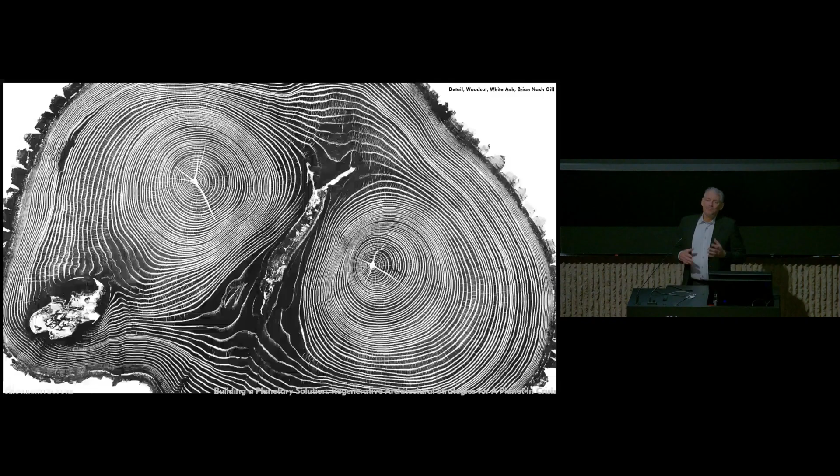So in some senses, as architects, we like to think that we talk a lot about material. And there's an inclination here that we're going to talk about biomaterial, timber. And I think that's because we see that as one solution. But I don't want to talk about the architecture of wood, although you can see from this crosscut of an ash tree that the sorts of flaws and checks and knots that are there explain why wood has been largely discarded until only very recently as a means to build urban centers.

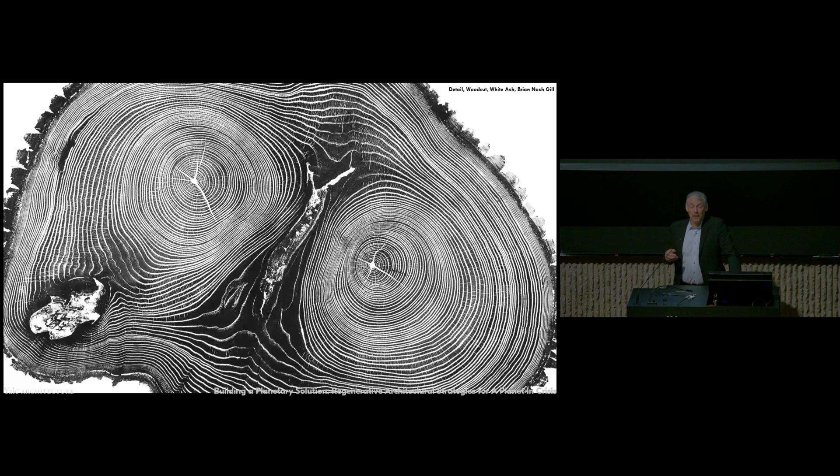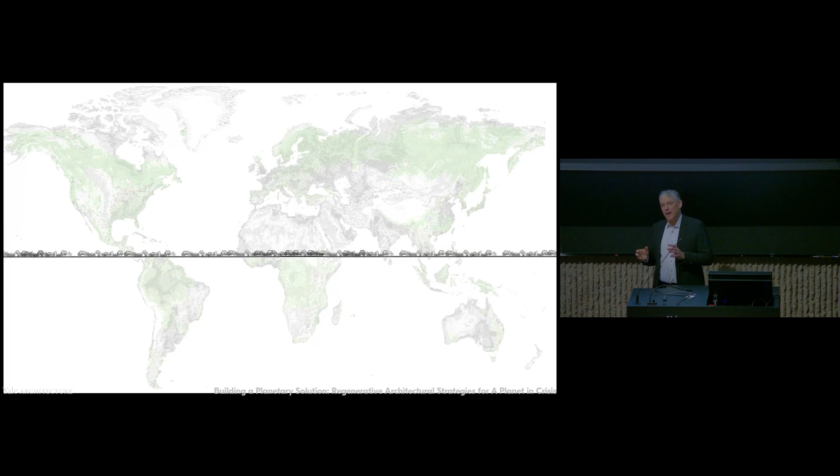Really what we're talking about is putatively natural systems, the systems that have been so thoroughly globally disturbed by human activity that it's hard to call them natural anymore, and their relationship to another land use, urban building and infrastructure. And these are two landscapes that have been historically antagonistic. I should say one is predatory and the other is prey: the city consumes the natural systems in different ways.

And because of that consumption of material and the drawing upon those resources globally, we've created this giant hole in the planet. I use that obviously metaphorically, but also literally, that these processes of consumption, often remote well beyond what we can see or feel or experience, are actually starting to create overt burdens that will be unsustainable, despite our goals over 20 years to be sustainable.

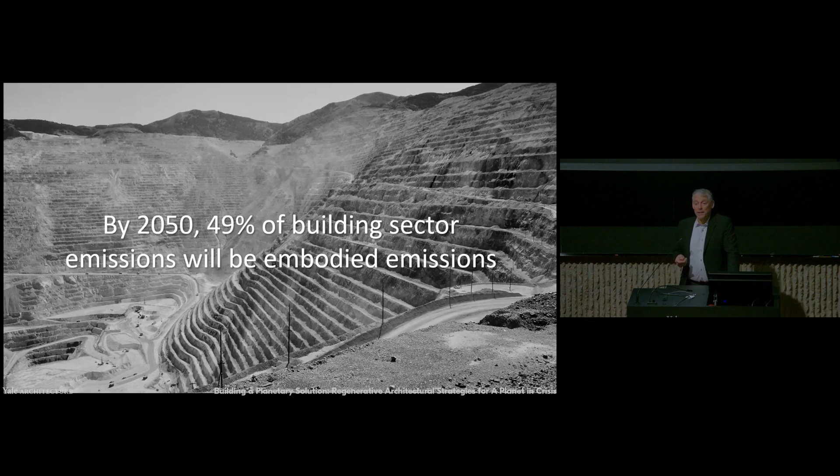Oh, and this chestnut from the Architecture 2030, that, as I mentioned before, nearly half of all of the emissions that we experience in the next 25 years won't be because we're burning too much energy for heating and cooling our buildings, but because we'll be building the buildings, and all of the energies and impacts that go into that will represent half of all anthropogenic building-related impacts.

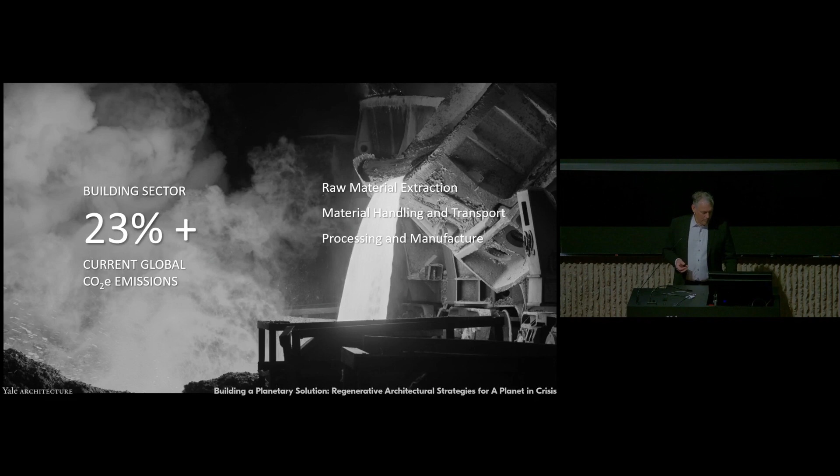And so to break that down really quickly, half of the half, roughly 23%, is associated with that production phase, or so-called embodied phase of building: raw material extraction, material handling, transport, the processing and manufacture of different products. Construction and maintenance of buildings over the building life cycle will entail exchanges of material and human power. And then finally, at the end of the life, which we've thought very little about, we demolish buildings, we often landfill them, and we create a new, almost anthropogenic mat of a new geological stratum across the planet.

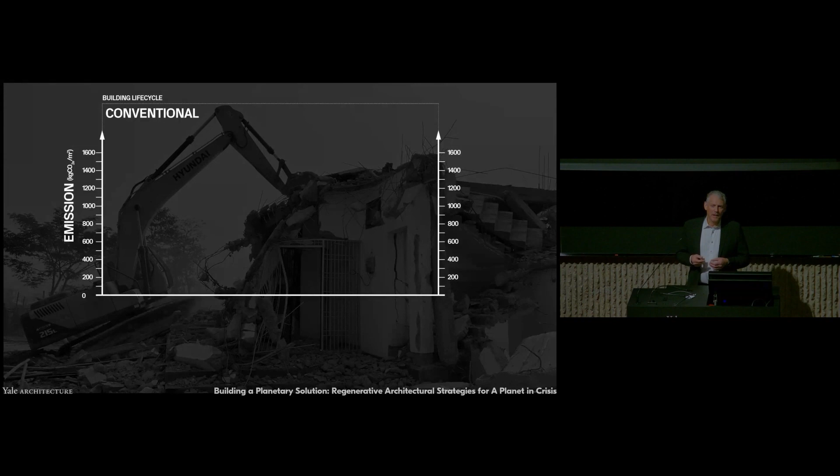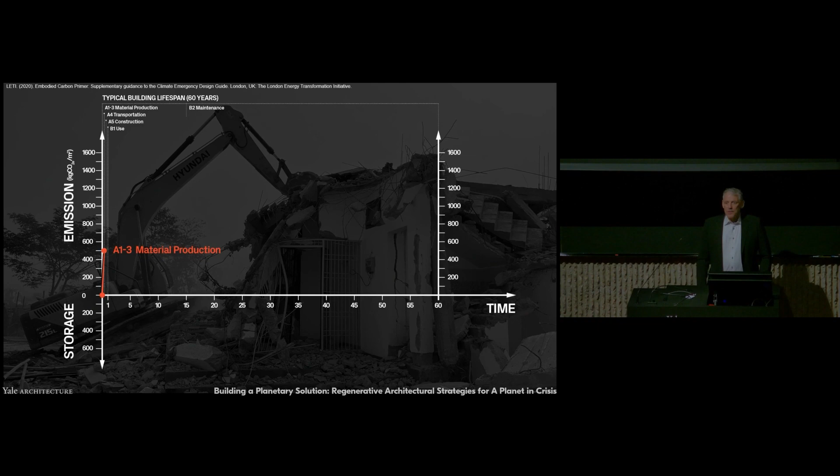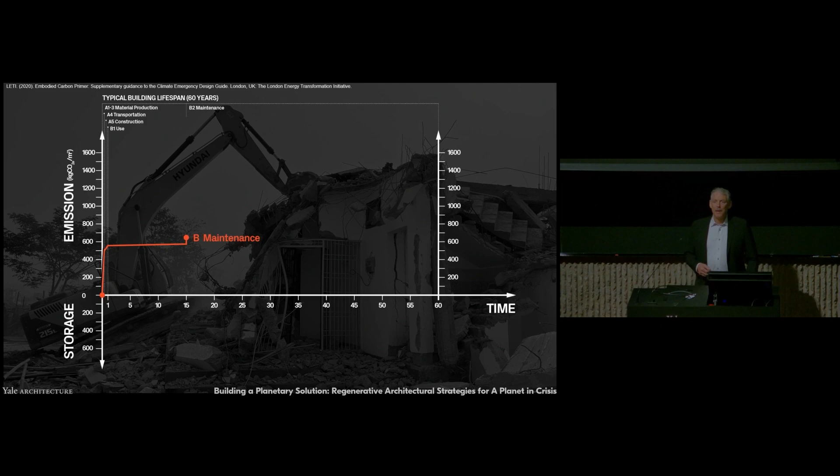There's a little spike. Seems little. Right at the beginning of the building life cycle, in the first year of life, as we create this building and move things into the construction site and build. And then the lights go on and people move in, and maybe 10, 15 years in, we have a little pulse, which is based on the maintenance requirements of the building. And then 15 more years go by and we do some repairs, and that creates another little pulse of carbon emissions. And then again, retrofit when the building doesn't seem to work for us anymore. And then finally at the end, we give up and we tear it down, and we call this the end of life.

And so what we really focused on in the building sector, because we want to be sustainable and we have the right ideas in our hearts and minds, is to make buildings operationally efficient, adding lots of material layers, creating a lot of complexity in mechanical systems to produce high efficiency buildings, or in the case of passive house construction, super efficient buildings. And it's important to note, as I said, that we don't pay off that embodied debt for 25 years if we're just making buildings with business as usual approaches. And if we're super efficient in our buildings, even passive house construction, we never ever pay off that debt, or at least not within the range of climate action that we have.

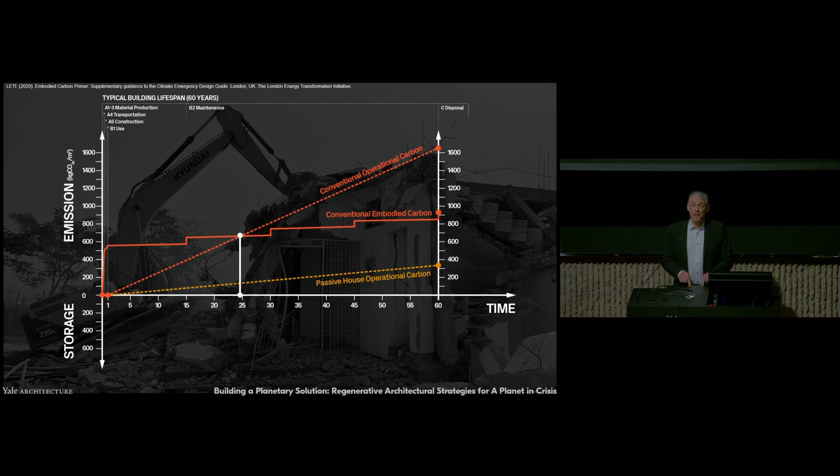And so that's a really important thing to remember, that if we want to act now, we have to think really hard about how we consume materials and how we specify products in our buildings. And I would say even further, we can really expand beyond what lifecycle assessment allows us to consider, which is what happened to those ecosystems from which we dragged resources? How are they doing? And what's going to happen at the end of life to these buildings? Are they going to be landfilled? Could we actually not only design for disassembly, but design for scenarios of reuse of all the materials we put into buildings? This is a huge burden for architects and engineers and builders, but it's something I think we inevitably must face.

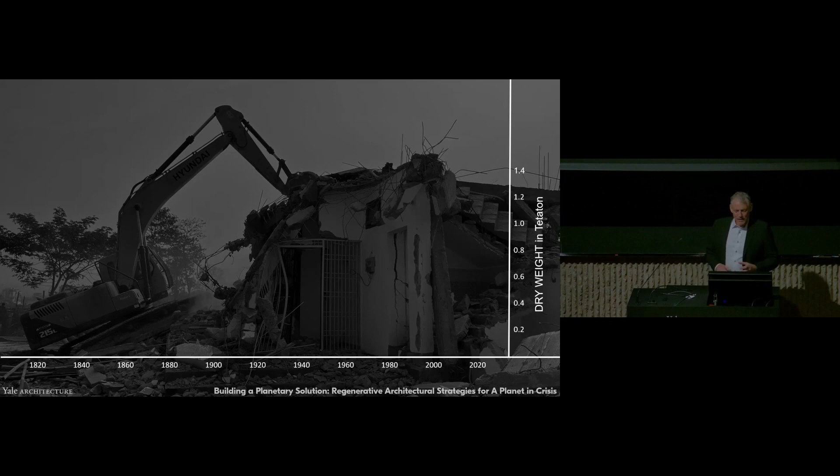Let me give you one more graph. This is a graph of the weight in teratons of mass on the surface of the Earth. Biomass has been pretty steady. Despite population growth, the biomass on the Earth sits at a little under 1.2 teratons of weight in the planet. The stuff we make has, in this red letter year, the products of the technosphere have now exceeded the weight of biomass in 2020.

And so essentially what we're doing is we're loading the Earth. Not only are we extracting, but we're also burdening the planet. And I think those are really two important ways to think about it. The materials, obviously, are all the materials we use to make buildings.

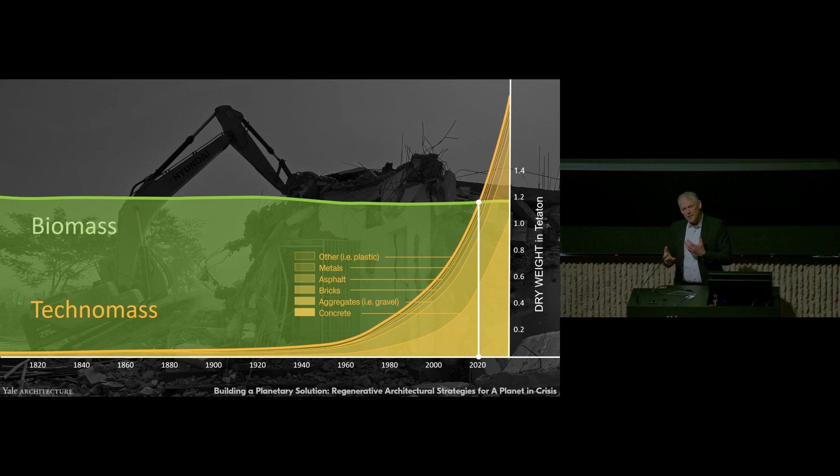A mentor of ours, Tom Graedel, a father of industrial ecology, used to hold up his cell phone for audiences in his classes and say, every element in the periodic table, except the radioactive ones, although we don't know what Apple has in mind, is in this phone. And so imagine a building as a huge phone that has enormous amounts of material, an array of elements that we're not even sure how to discern and separate for reuse, which will be an important topic of today's conversation.

And lastly, you're all really familiar with this graph. We've surpassed, only a couple of months ago, our 1.5 degree Celsius guardrail. And that was supposed to happen in the 2030s. And the 2 degree guardrail is coming up quickly. And if we keep going, we're going to have this business as usual scenario.

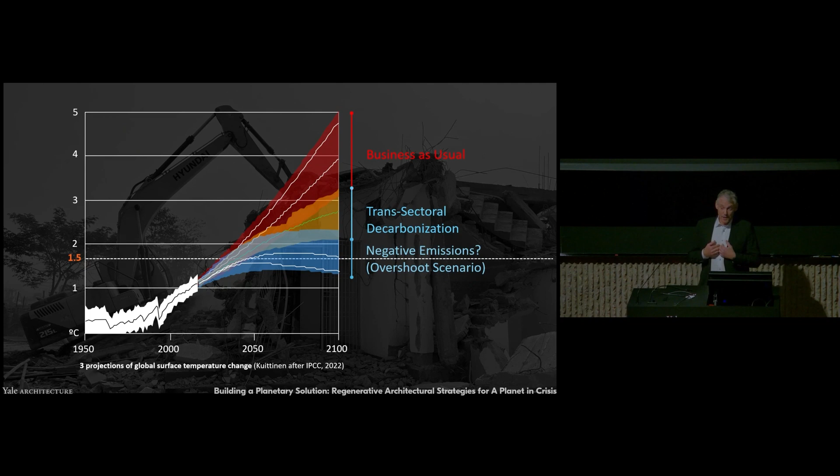The planet will truly be uninhabitable in the next 50 to 100 years, or at least maybe not for the wealthiest of us, but certainly for the most disenfranchised populations, not to mention all the species who inhabit the planet with us. And if we proceed with the trans-sectoral decarbonization strategies that have been identified by some of the leading thinkers on the planet, we're going to level out in the best case above 2 degrees.

And so the question is, given all the material we specify, is it possible that we could specify materials that would actually create a reduction of that and a return, over a century, to a more stable and sustainable global temperature? These are questions.

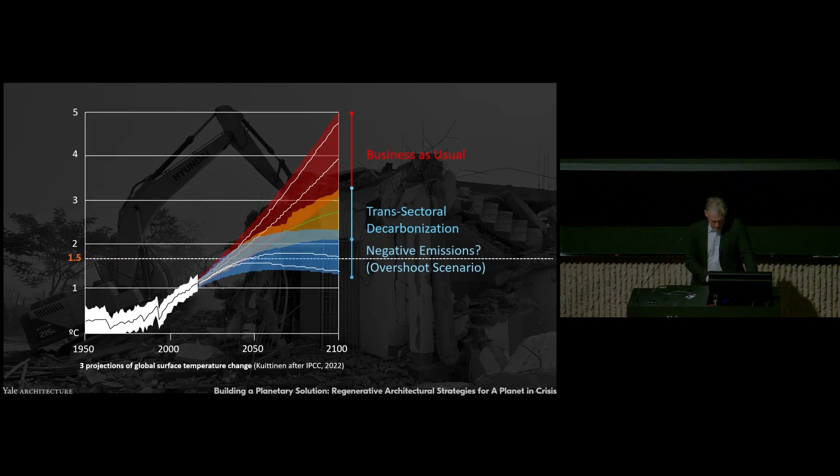One thing that we've talked about a lot, and I've studied with colleagues in the audience, is this idea that using timber in a synergy with forests could actually make cities carbon sinks, which, immediately once it was written in a report, was attacked by different people or lauded by other people. And I'm proud of the fact that it drew attention, and my co-authors were an array of interdisciplinary writers.

And what we showed was that essentially you could build cities with these new engineering materials, mass timber, engineered timber, things like that, and it would potentially have the effect of creating a giant carbon bank of photosynthetic carbon drawn sustainably out of the forests, put into buildings and stored there for the lifetime of the building and beyond.

But forests are already being managed in a sense, or mismanaged, through our activities or lack of activities in taking care of them and understanding their ecosystems. And we're very familiar most recently with smoke-filled skies 1,000 miles away from these massive wildfires that are occurring in Ontario and Canada and the Pacific Northwest, Australia, not to mention the Canary Islands. But there are a lot of forces at work in forest conversion that are changing forests.

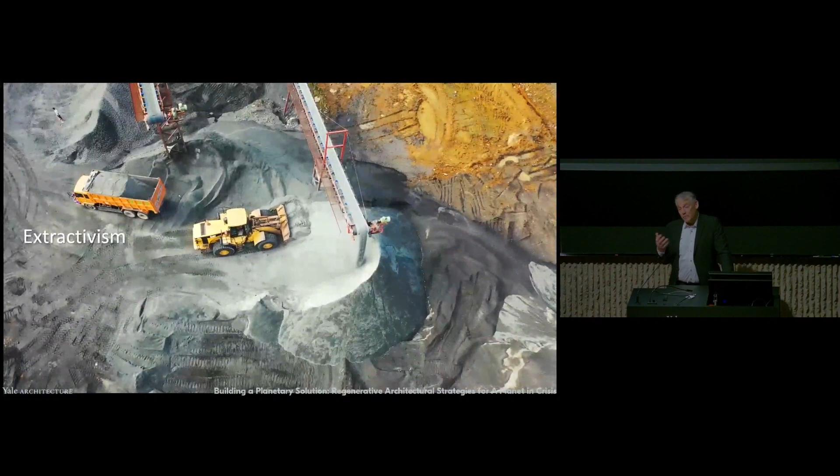And this all comes down to a kind of economic extractivism, which I'm afraid I and most of us here have been party to, which is that we assume these resources are available to us. We studiously ignore the externalities and the effects that happen outside of our cone of vision. And there are many forms of extractivism, and there are many results of extractivism, which we'll also get to talk about today.

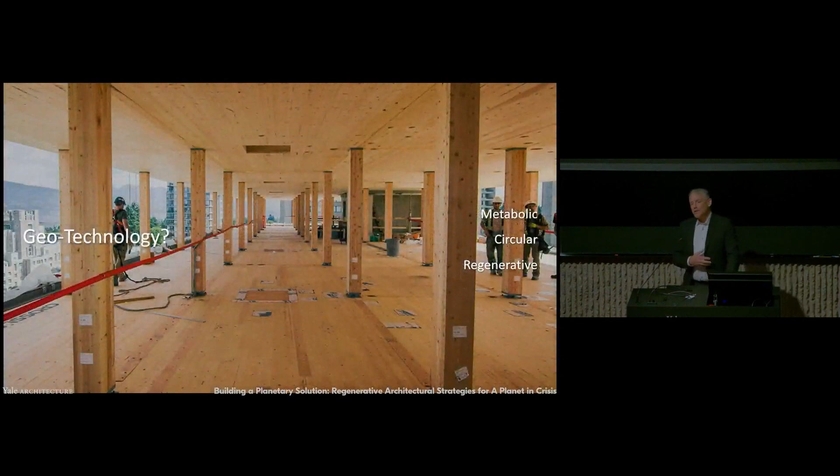So the question is, could we create a synergistic relationship between the science of biological systems, such as forests, that are obviously metabolic, circular, and regenerative when allowed to function well and when helped to function well, and a new way of building out this gigantic, massive building that we're going to create in the next 25 years, to not only try to reduce our impact and mitigate climate change by being a little better, but rather say that the building is an agent to restore global landscapes. And that synergy will take a lot of work.

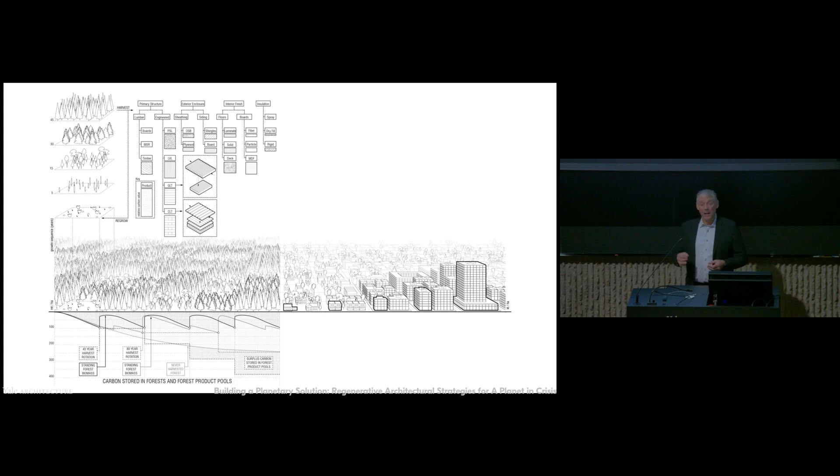It'll happen in places like the School of Architecture at Yale and others, the people that we collaborate with, to really understand the systemic development of forest stands, their successions, how they work, what kinds of biodiversity are created at each stage of growth, of regrowth of a forest, how we move products through that, and how we store and track carbon along that way, and studiously and transparently assess that, how we apply them to different building components.

This is the stuff that engineers and architects think about all the time, but if they thought about it with a much broader realm of thought and expanded system boundaries, we would be better off, I think. And then finally, embracing density, reducing the amount of land we use, sharing materials, all of the things that come along with really thoughtful human occupation of the land.

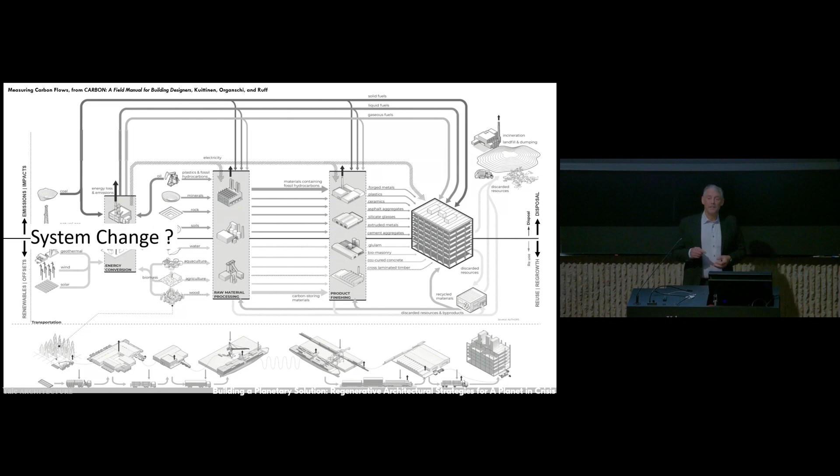And so that's the question for today. System change? Can we do it? What I would like to do is ask our speakers today, and there's an incredible array of people to help us answer this question, to address that.

And to address it, unfortunately, at a moment when a bias against science, or I would even say an ideology that is antagonistic to science, has now taken hold in parts of the world, especially in the most powerful nations, and now has been reified in the government of the United States. And so with that framework, I hope that we can address today ways that our own agency can produce profound benefits in a crisis that is political, social, economic, and environmental.

We have an incredible array of speakers to help us with that today, and I want to thank them all for making trips from far and wide and also near. And with that, I want to introduce our first panel. Anna Dyson will be moderating the first panel, which is entitled Terrestrial Challenge, Barriers and Benefits to System Change.

Anna's a close colleague of mine. We've worked on a lot of projects together. We've stormed the gates of the UN together to build a building that tries to demonstrate some of the principles that we think will help. And Anna's the Hines Professor of Architecture, pushing advanced research at the school here and at the School of the Environment. And I'm really, really proud to have her open this presentation. Thank you, Anna.

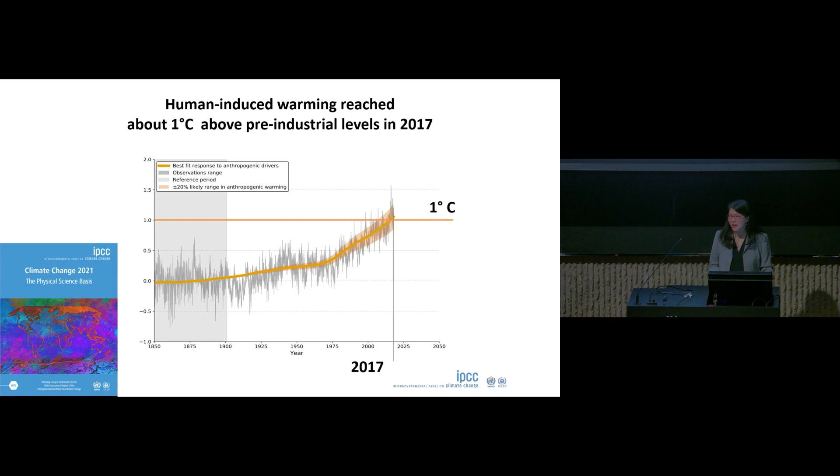And since the IPCC was formed it has generated 6 assessment reports. I've been involved in the last 2 assessment reports. The last one was published in 2021, and this is one of the visuals from the 2021 report. And in that report, we concluded that human-induced warming had reached about 1 degree C above pre-industrial levels as of 2017. Now, Alan's already given away my punchline, but I'll keep going. And in that report, which was just published a few years ago, we also said that if current warming continues, we're going to reach 1.5 degrees C around 2040.

And why do we scientists and policymakers focus on 1.5 degrees C? It's largely because even small increases in temperature beyond this threshold can really significantly exacerbate the risks and impacts of climate change, everything from extreme heat to fisheries loss. So the critical point here is that we have focused on 1.5 degrees C because we know that going beyond 1.5 degrees C will have a really big impact. But again, as Alan mentioned, just last year, we have data from 5 different sources that confirm that we have already exceeded 1.5 degrees C.

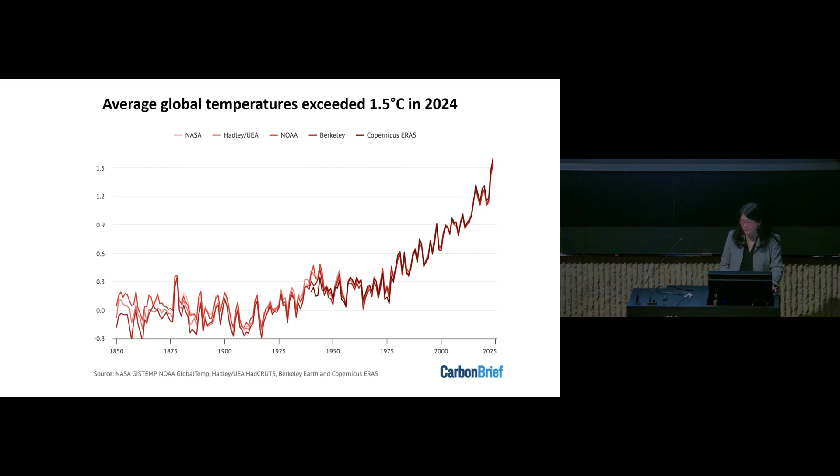So we've already exceeded 1.5 degrees C above the pre-industrial average. And the question before us is, how do we limit further warming? And if we look at the various climate scenarios, you see there are very large variations of future emissions and warming. But in order to understand what might happen in the future, we really have to have a good understanding of the main drivers of emissions today. And that gives us an indication of how we might limit global warming in the future.

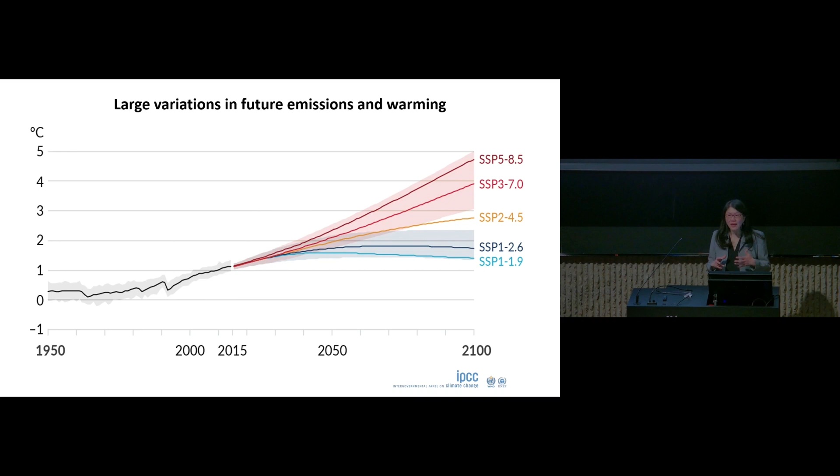Now, I should say that for the first 4 IPCC reports, the focus was on the energy transition. And cities were barely mentioned. They were mentioned through chapters on land, on energy, on transport, on buildings, but the lens was through sectors. It was not through cities. And it wasn't until the 5th assessment report that the IPCC started looking at cities as a way to mitigate emissions.

So what we have learned from these IPCC reports is that existing cities use about 78% of the world's energy. That's not the same thing as CO2 emissions. We see that existing cities account for somewhere between 2/3 to 75% of global carbon emissions. But you see that there's a very large range in per capita carbon emissions. So in developed countries, which constitute less than 1/4 of total urban population globally, we generate about twice as much carbon emissions per capita as the average person in Asia and the Pacific, and about 5 times as much as the average person in Africa.

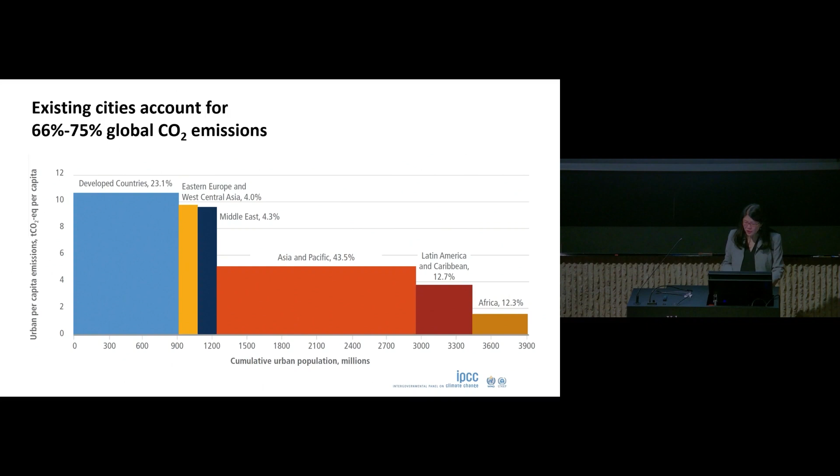Now, I want you to keep the shape of this graph in mind, because I'm going to come back to a very similar shape in just a couple of slides. But the key point here is that there are very large variations in per capita emissions, and this is very tied to our built environment. But if we look in the future, we know that the urban population is going to increase somewhere between 2 to 2.5 billion out to 2050.

Now, during COVID, one of the most common questions I was asked by policymakers was, will urbanization continue? Will these numbers stand? And the thing that I would repeatedly say to policymakers is, yes, people are moving to smaller cities, but they're not going back into farming. Maybe they are weekend farmers, but people are still moving into cities, maybe smaller cities. So this is still a major trend.

This translates to about 1.3 million people moving into cities every single week. It translates to building urban areas equivalent to 20,000 American football fields every single day. So the scale of this transition is really enormous. And so, again, one of the first key messages of this is that how we build future cities and their infrastructure, and again, I really want to emphasize at scale, will shape emissions.

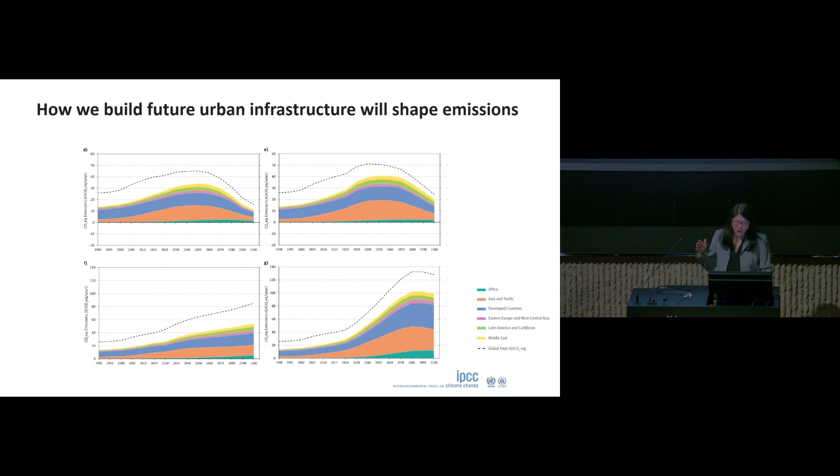And here what you see on this slide are 4 different scenarios of future urban emissions that depend on how you design, build, and operate these future cities. On the y-axis is total carbon emissions per year. And you can see that in very different scenarios, we can either have peak emissions sometime in the middle of this century, or in the bottom 2 scenarios, we see carbon emissions continue to rise even at the end of this century.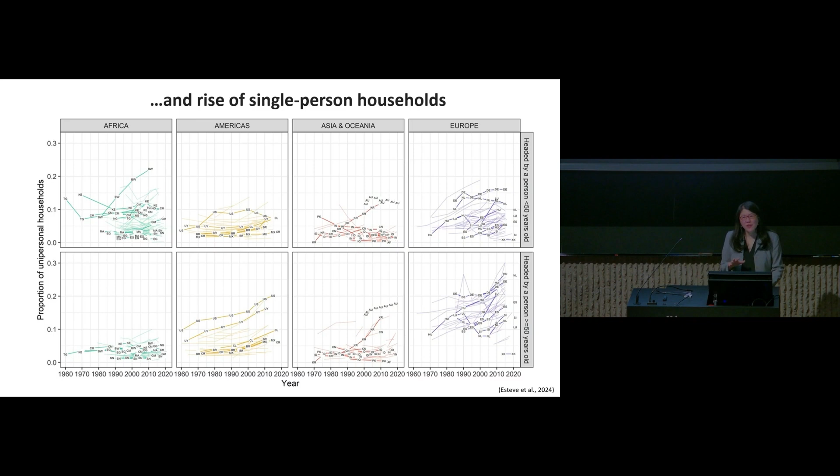So if we combine some of these statistics and model what might happen in the future, we see that we're going to build a lot more urban areas, we're going to transform a lot of land. Depending on how you look at it, it's either good news or bad news. Somewhere between 40 to 60% of the projected new urban areas in 2050 have yet to be built today. In other words, there's a huge opportunity going into the future.

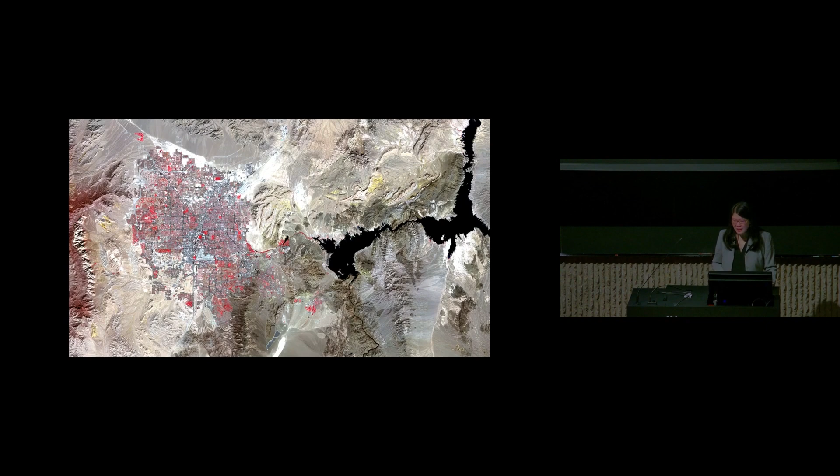But it's not only the land use change and carbon emissions. We know that future urban expansion could drive significant habitat loss and conversion. Some of the work that we've done in my lab shows that future urban expansion going out to 2050 is going to lead to habitat loss for more than 10,000 species of just terrestrial vertebrates. We didn't look at other species, just terrestrial vertebrates.

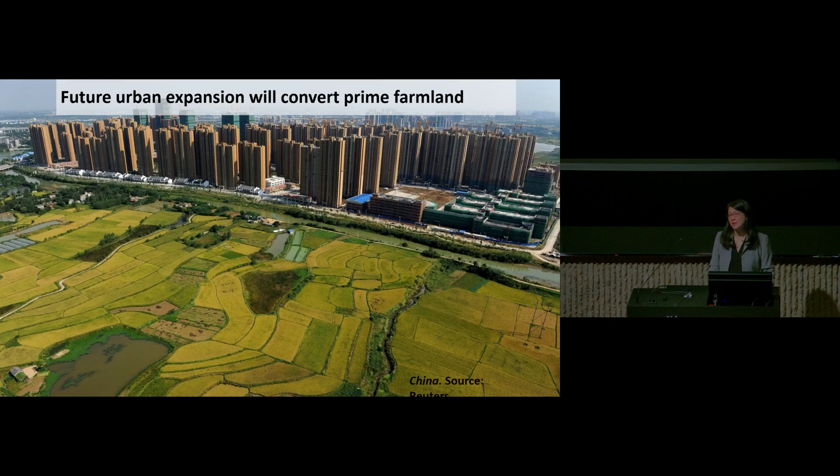And it's not just biodiversity, it's also farmland. All around the world, urbanization and urban expansion is taking place on prime agricultural land, whether it's in China or in Canada or in Egypt. And layer on top of the loss of agricultural land the stress of farm production and yields due to increasing temperatures and droughts as well.

Farmland loss is going to be acute in certain parts of the world. In Egypt, we forecast that the country will lose about a third of its most productive farmland. China will lose about 5%, Nigeria will lose about 5%. So again, this is just due to urban expansion. It doesn't even factor in the loss of harvests due to climate change.

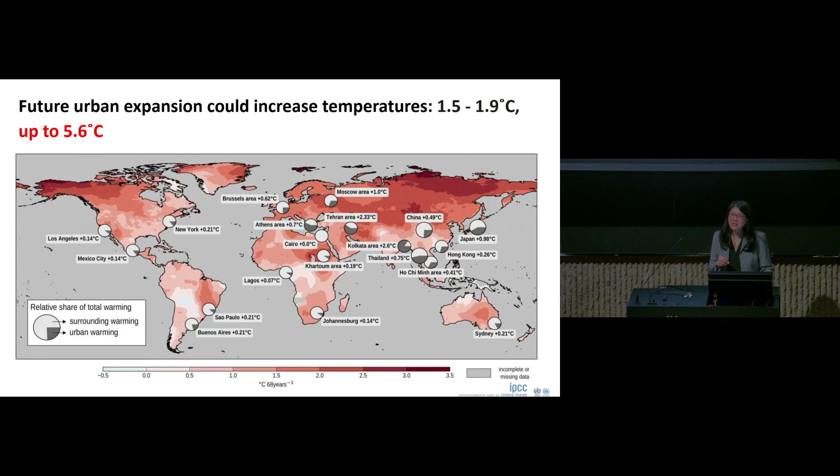We also know that future urban expansion could increase local temperatures, in some places up to 5.6 degrees C. And I want to emphasize that this urban-induced warming could exceed warming caused by greenhouse gas emissions. So in other words, how we build our cities, the materials that we use to build our cities, the layout of urban form, could increase local temperatures more than global climate change. And this is especially the case in the Global South, the areas that I have highlighted here.

I do want to end on an optimistic note, though, and that is that international policymakers and international discussions have really focused a lot more recently on cities as potential solutions for climate change. When I first got involved as an IPCC author more than 10 years ago, when we presented the final report in Berlin in 2014, countries around the world weren't sure what the role of cities was in mitigating climate change.

When we presented our chapter on how cities could mitigate climate change, in fact, policymakers asked us questions about how important cities could be. Aren't they just so small? They occupy such a small area on the landscape. The impression at the international level was that cities just don't matter. We have to think about the energy transition, the big picture. So this is the optimistic note.

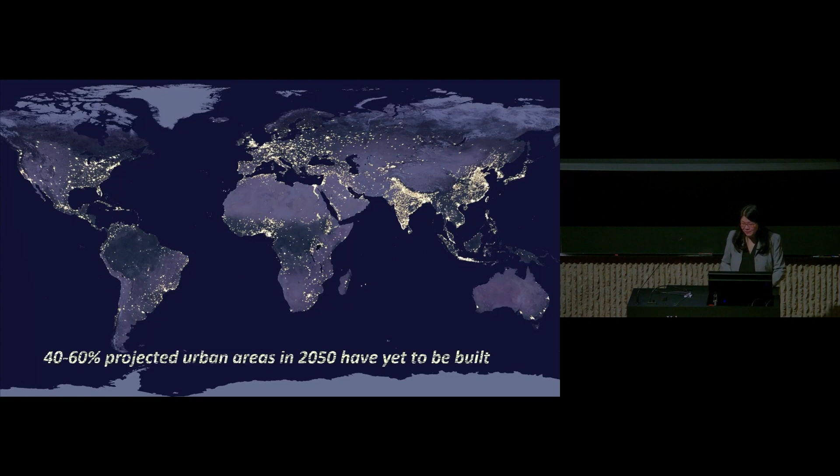And again, I just urge that we need to come up with solutions that can be implemented, not for one city or even one building, but what could be implemented at scale. And here I want to just end with emphasizing that we have this incredible opportunity and challenge. We've done forecasting work in my lab where we've shown that most of the urban areas in the future have yet to be built. So with that, I thank you for your attention.

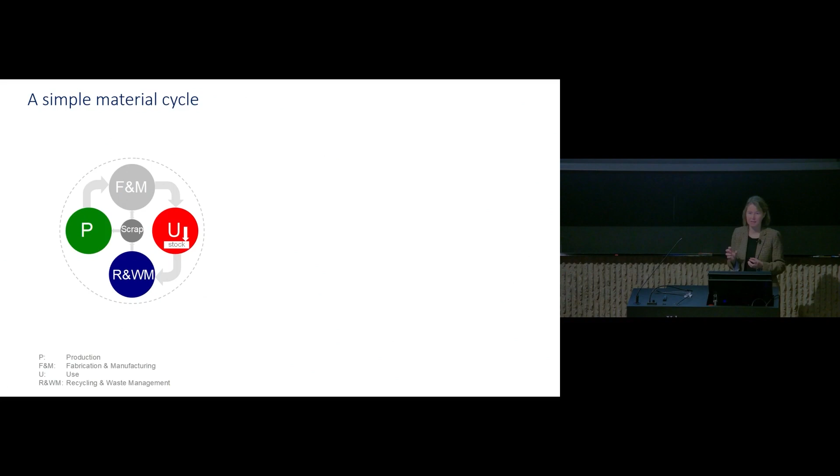So going back, how do we assess circularity then? Circular solutions are really making a dent also on recycling. The way we are doing this in industrial ecology, we simplify the world into production of a material, fabrication, manufacturing, use and recycling, or waste management, but we only have the circular material if in the middle you really reuse the scrap that is generated at various life stages and make sure that it replaces primary material. So here we have the extraction, the fabrication, the use, and the waste management. That is the very simplified version.

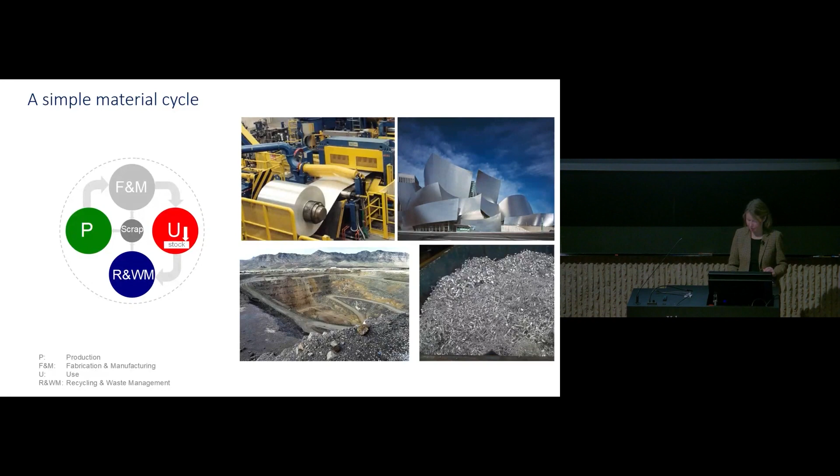That is because we are using steel in long-lasting products, on average 20, 25 years. And we are using more every year, so you have this lifetime delay that is really exacerbated by using more and more every year. So even if you had 100% recycled material available from 20, 30 years ago, it would only cover a fraction of today's demand. That is really the big dilemma in the metal industry in general.

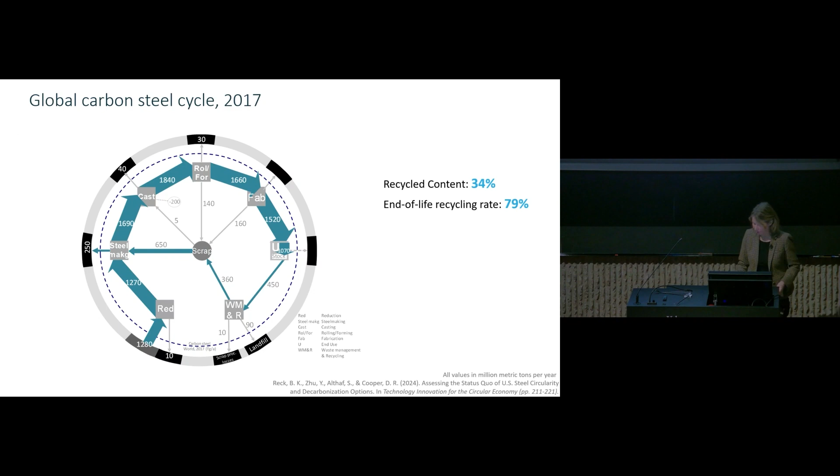This was the high-level view. If you're doing these studies in detail, it looks more like this. We don't need to go through this, but the point is that we are looking at these statistics in as much detail as we can. Very broadly, to the left in dark gray would be the primary input material, and in light gray is the scrap. But not just end-of-life scrap, also a lot of processing scrap, which you could say are inefficiencies in processing in the first place. And then you're using them in all kinds of materials.

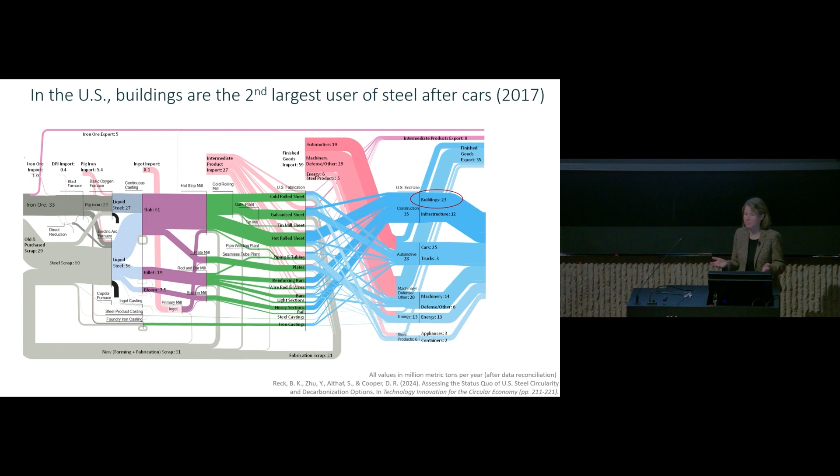I highlighted here the building sector. This was for the US. In the US, maybe a quarter of the steel goes to buildings. But at the global level, it's more like a third, because in the US more steel goes into cars, and cars are not used as much in other countries as in the US. That's the explanation. And you can do this material by material. We have here the same thing for aluminum.

And here, just to illustrate, these cycles look very different material by material, because the processing and the whole usage, everything is different. And you have to go with available data. But in the end, we can aggregate the information to global cycles.

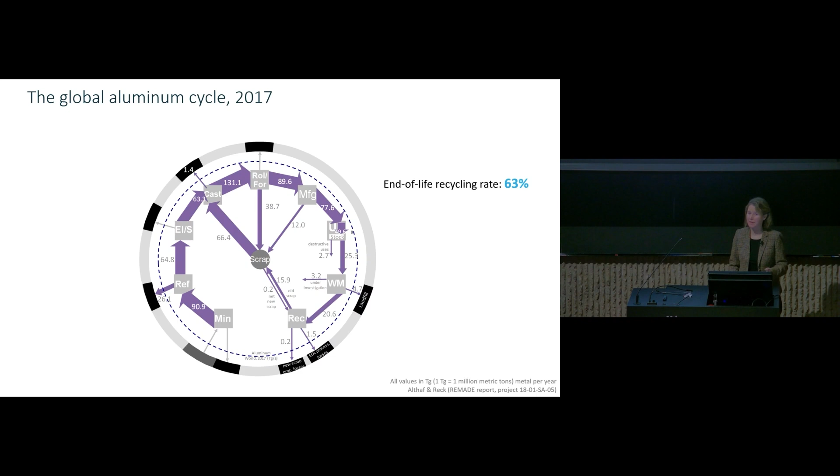And for aluminum, which again looks somewhat different, we have an end-of-life recycling rate that's already at 63%. So recycling options are limited. And so again, a recap of those conventional materials: cement and steel, carbon intensive to produce. Cement, there's basically no recycling. Steel and aluminum are okay, but can only cover a relatively small amount of the total demand because of long lifetimes, and we are using so much of the material.

So then, okay, what's next? One is also to say, well, historically, how have we been using materials? And this is from a group in Vienna. They're always looking at all materials, including biomaterials, and they're looking at economy-wide flows. So they're not at the substance level, what we are doing, but really just for anything. And here in green we have biogenic flows, and in blue we have metals and minerals, and then fossil.

And so in 1945, it was mostly biomass, in green, but by 2015, this has completely changed. And so first we see how much more materials we're using. Another visualization, what Alan showed earlier on, and the metals and minerals really overtaking.

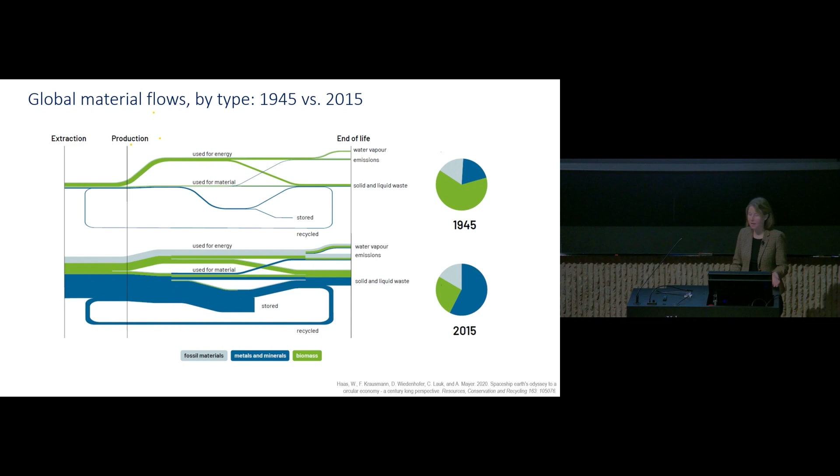And then we're going back to the UNEP report with Anna, and there we said, given this and lots of other studies that we did, a sustainable future needs to change this ratio of bio-based versus non-bio-based, and we have to go back to using less of the non-renewable materials and increasing use of bio-based materials, and also, in the middle, we need to use lots more recycled materials. So circularity, which we will talk about this afternoon, is really, really important in all this.

So then we looked at the absolute numbers. This was from existing research, and currently in the built environment, most material being used is concrete, and these are not greenhouse gas emissions, this is really mass of materials, then steel, and then the bio-based relatively low. And what we see in those dashed lines here is that for steel, we have a big chunk of secondary material. We basically have none in concrete, and we have a little bit for the other materials, but not much.

And our vision was to say, this would be the more sustainable solution: a general shift to bio-based and a general shift to lots more reused materials, and particularly for concrete, which Phil may mention, there is this reuse of concrete, which really would help. And so going back to the original cycle, this would be the bio-based material cycle that we'd like. Thank you.

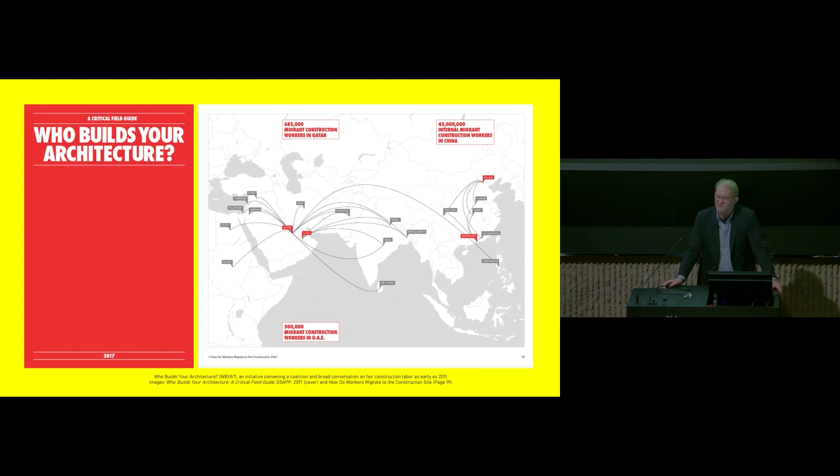So, as architects, we tend to think of this problem as labor abuse on construction sites. This was from the Architect's Newspaper with the Saudi NEOM project recently. Then there was Mabel Wilson's work from 2017 called Who Builds Your Architecture, where Mabel and her team from Columbia mapped the flows of construction workers relative to the flows of design information that come from architects.

And what we know is the supply chains that architects live at the front of include enormous sequences of labor abuse of which we are largely completely unaware. And the challenges of our relationship to those supply chains is very similar to understanding the relationships that Alan and everybody here at the symposium are going to be talking about.

So the first question is, what is this thing? We're still trying to get our arms around the question of what the definition of forced labor is and where does it happen in the construction supply chain. And it's not simply on the construction site.

And some of our work has begun to appreciate the fact that there are these whole systems of folks working under various kinds of conditions that are a kind of subtext to the overall building supply chain and the building materials chain. And really what we're trying to figure out in our research right now is how do we figure these supply chains out from a labor perspective? And how do we define equity in those supply chains where folks are simply not being forced to work on things that are related to the building supply chain?

So the definition we've been working from is the following, that forced labor is all work or service which is extracted from any person under the menace of any penalty for which the said person has not offered himself voluntarily. And so these systems that we as architects leverage contain enormous amounts of this kind of labor inequity, but we really don't understand them very well at all.

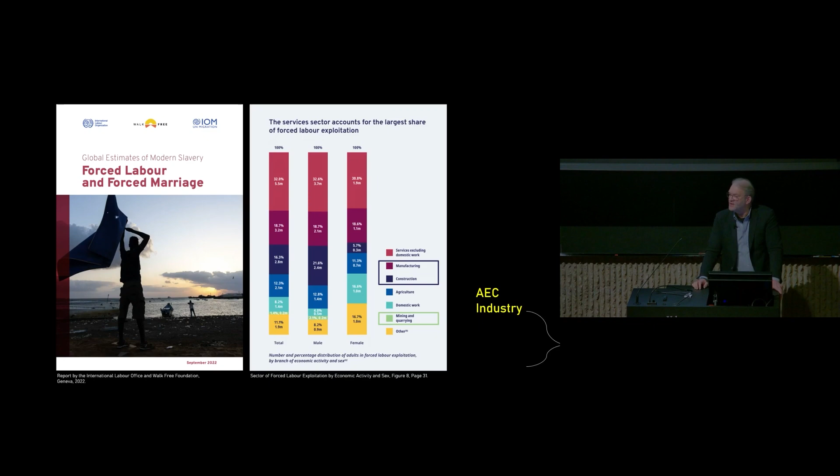And this is some statistics also from the ILO that show you where our problem is. Our problem is somewhere in the intersection between manufacturing and construction. It's not entirely clear how you define those things, but the supply chains and the economic flows that are related to forced labor encompass the entire planet. These are valuations of materials related to folks who have been exploited from a labor perspective in the overall supply chain.

Now, interestingly, my teaching colleague on this project has been a gentleman named Lou CdeBaca. Lou is a former U.S. ambassador. He teaches at University of Michigan now. He started the forced labor unit at the State Department under the Obama administration. And Lou wrote a federal regulation that makes it illegal to bring any material made by forced labor into the United States. The question is, how do you stop it?

And so when we were trying to teach this question to our students, one day in the first year I was teaching this course, I asked Lou, don't think about this problem. Pick the material that you think is most problematic from a forced labor perspective in the building industry. And he said, it's easy, zinc. And I thought, uh-oh, this is a building you're sitting in right now, largely encased in manufactured zinc.

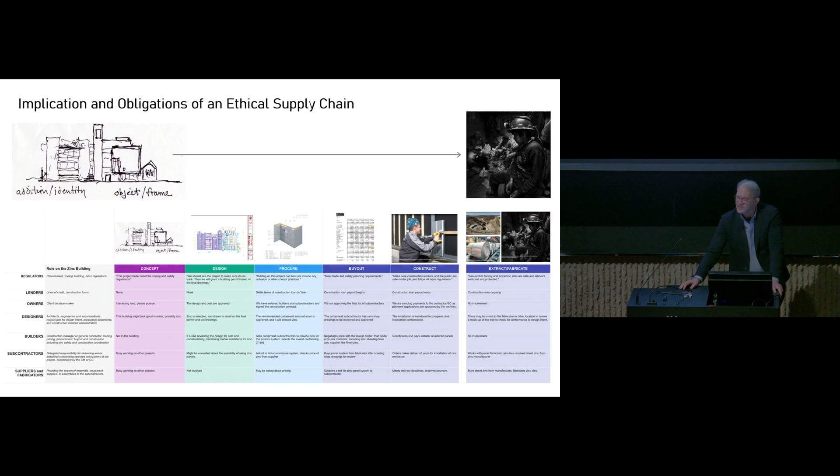And so we built this diagram for our students that essentially described how Charlie Gwathmey, when he made his sketch of the building you're sitting in right now, which is up on the left, that set of ideas flowed through a whole complex system of decision-making, risk allocation, profit objectives, and other kinds of motivations, and ultimately led to the enslavement of this child that you see in this Peruvian zinc oxide mine. And you can see here, don't try to read this chart because we can't even read it, but all these players through the entire process involved in all these different kinds of transactions.

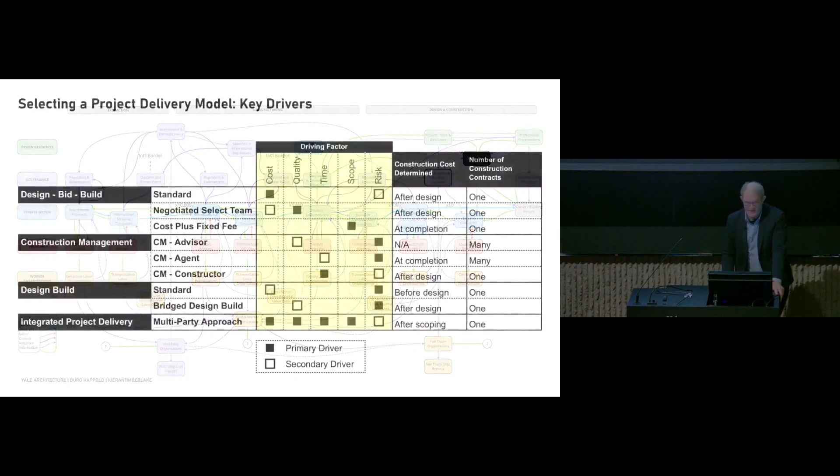And the problem, of course, is that we as architects make our systems decisions based on how projects are structured. Who's the contractor? Who's the subcontractor? Who are the engineers? When you try to bring the labor question into this equation, it gets extremely complicated.

I'm going to skip through some of these, but the other question that got raised very interestingly in our profession was when Martin Filler wrote an article, which he subsequently, by the way, had to retract in the New York Review of Books, asking Zaha Hadid what she thought about forced labor on her construction site. She said, I have nothing to do with the workers. I think that's an issue for the government. If there's a problem, the government should pick it up. Hopefully these things will be resolved. It is not my duty as an architect to look at it. I cannot do anything about it because I have no power to do anything about it.

Now that's perhaps a misstatement of the facts in that particular situation, but I think it does synopsize in some form the attitude that many architects have about this particular problem. So the question is, what as an industry, what do we do about this? What's our actual approach to this problem? And it's really kind of an intractable one.

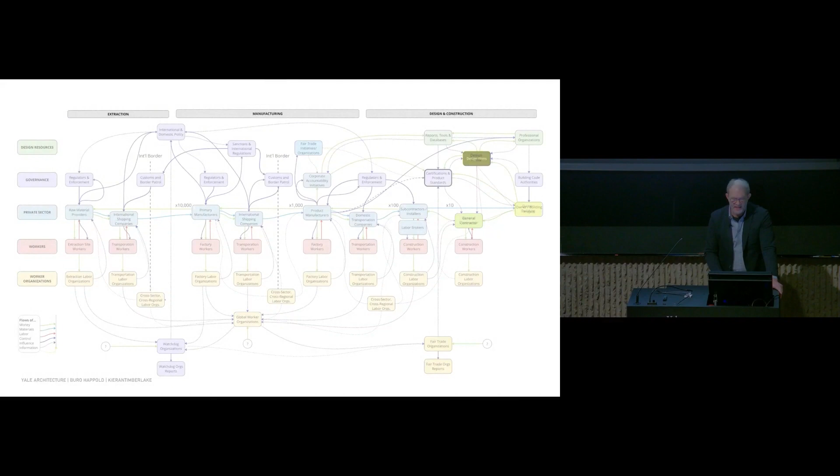But the way I think Billy describes this really, really well has to do with supply chain distance and perception, that we somehow live on the right-hand side of this diagram and that the industry itself lives on the left-hand side of this diagram, and we're going to have to find a way to connect those things.

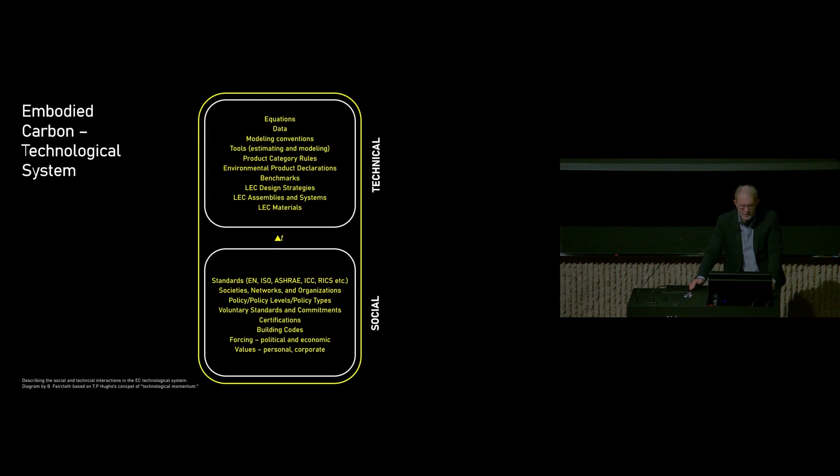And so the thing that's interesting about this problem is it has a direct relationship to the thinking we believe around climate change. We think that certain kinds of analytical strategies and disciplinary approaches around life cycle thinking or possibly embodied carbon modeling might be applicable in this situation if we can figure out a relationship between technological questions and sociological questions. Where do the kind of human rights standards overlap with the sorts of instruments that the industry can apply as technical solutions? And what sorts of things could actually happen?

And there are a lot of framework reports out there. There are lots of strategies that have been attempted to calculate labor exploitation. Our team put together a project to try to look at whether we could model this. Could we create a strategy based on embodied carbon where we could somehow model embodied suffering? And I'll save you the trouble. The experiment was a complete failure. We felt like we worked for a year and a half trying to figure this out. The system actually failed.

And we concluded ultimately that a purely technological solution, a modeling solution, was actually unlikely to solve any problems. And it actually created more problems than it identified. This is what our team calls the risk of identifying risk. When you identify a labor problem at the end of the supply chain, you may eliminate it, but the people who are no longer enslaved are now starving. And so what are the secondary implications of this, and how do you attack the problem?

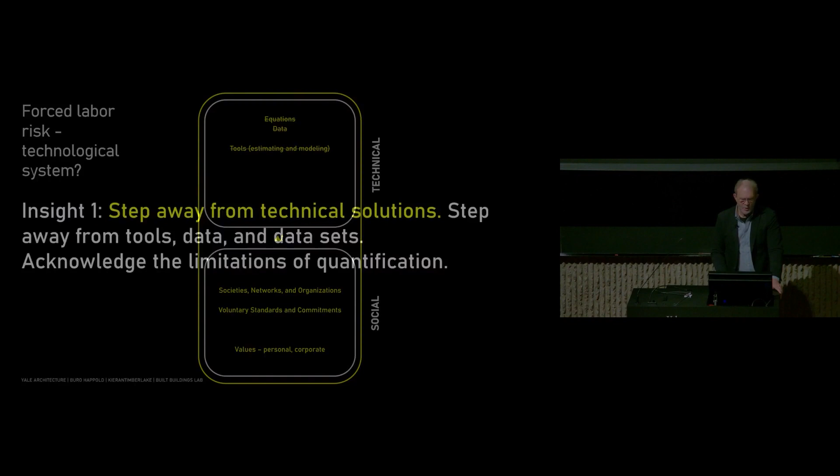So I'm going to skip to the end of this. So when that experiment failed, what we kind of decided was a couple of things. Number one, maybe the answer, despite my own inclinations, was not technical. This wasn't a tools problem, wasn't a data problem, wasn't a database problem, that we actually needed to understand these flows in a different kind of way, and redefine the building supply chain, the delivery model, from the design firm's perspective in a different kind of way.

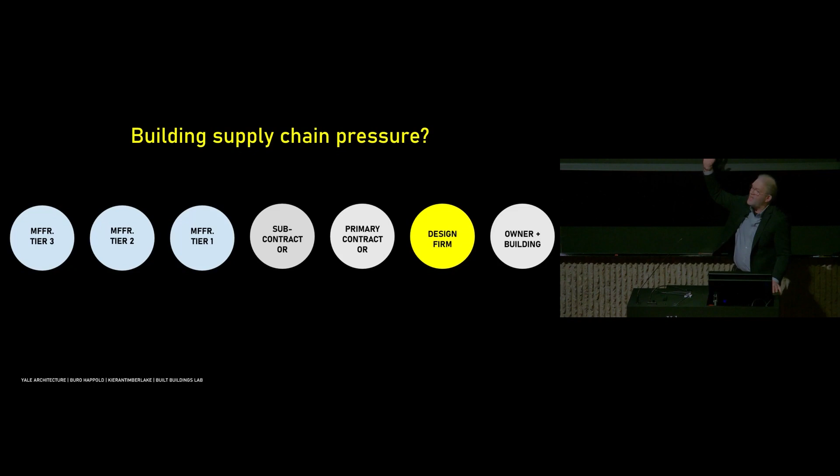This is the way, in my classroom, I describe the building delivery structure from the architect's perspective. You've got your client, you've got your contractor, your subcontractors, but in fact, this problem is really defined by this. There are tiers of workers involved, and the architects need to find ways to see through the system to understand the relationship between these pieces.

And so that's sort of what we've been trying to work on, and what we're going to try to do going forward in abandoning some of these technological solutions is to try to look at the problem from the opposite direction, look at it from a sort of a worker-led approach. And I think that's to some degree analogous to some of the work that we were just seeing about trying to understand where the carbon is. But we need to figure out, in a way, starting from the back end of the supply chain, where these problems are and try to work them forward from there.

So with that, I will turn it over to Phil. Thank you.

Thank you, Phil. So we have another Philipp Misselwitz, who is the CEO of the Bauhaus Earth and chair of the Habitat Unit at the Technical University.

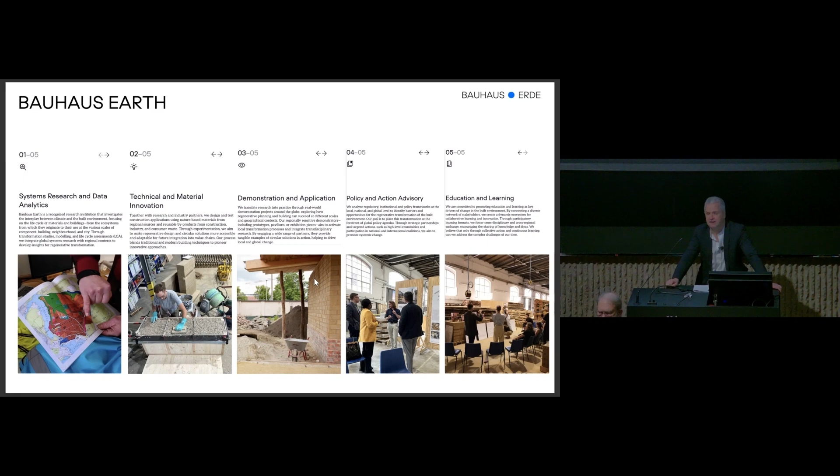We also work in a really networked way, and there are many people that are part of our new Relab network that are also in the room, like Matti Kuittinen and Dani Ibanez and others, and we are really hoping also to extend this. Boots on the ground means working in networks, working with really exciting people that are embedded in different environments, different geographies, that we need to network, particularly in these challenging political times.

So I'm going to do a bit of ground truthing for you, referring to a project that is called Rebuild, that is funded by the German government, that takes us to these locations in really exciting local partner setups, to Berlin-Brandenburg, Peru, Thimphu in Bhutan, Denpasar, Indonesia, and Cape Town in South Africa.

And I'm presenting some sets of thinking and a kind of knowledge that I think really is complementing the kind of exciting studies that were presented here in the panel. The need to link policy and science on a system level, global system level, to really place-based contextual conditions, and to seize also the momentum of frontrunners and innovators.

Sometimes they come from architecture, sometimes they come from completely different fields that are often struggling to get resources, to get support. They have many ideas, but they fail and struggle to be scaled because of a lack of resources. And I think we, despite all the cuts and the craziness happening in the science funding world right now, still are close to the trough. We have the resources, so we need to make sure that we channel them to areas and support innovators that work elsewhere.

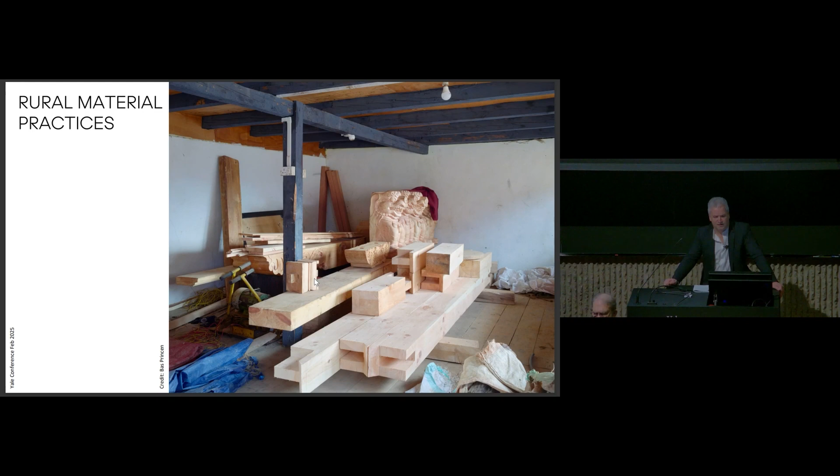There are many forest practices that remind you of ancient practices of hunting. So people from local communities tapping into community forest, just cutting out what they need, log by log, in the forest, and putting it to use. And that knowledge exists also in the rural parts. It exists in renovating amazing historic monuments. It is often also combined with a still alive culture of rammed earth construction, bamboo construction, but it is lost when it comes to the urbanizing valleys.

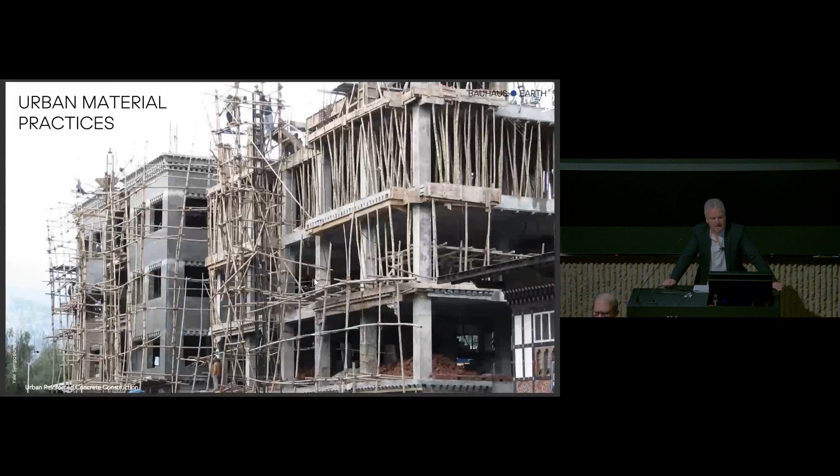This is Paro Thimphu, the capital region of Bhutan, where suddenly these material practices completely change. They're actually not in control of local craftsmen and local contractors, but mainly imported labor, imported materials trucked up from India, for instance, through the narrow valleys to the more than 2,000 meter high Paro Thimphu, and then being applied here using migrant labor, imported materials, etc.

So there was a very exciting process going on involving Arup and private partners, commissioned by the government, to do a structural plan for the capital region. We were able to benefit from the amazing material demand analysis that came with that, assessing what future demand exists in this kind of valley and putting in contrast an ongoing assessment of what source landscapes exist in Bhutan that may feed the material demand for this urbanization as alternatives to the imported steel and concrete. So we looked in particular at timber, but also at hemp and bamboo.

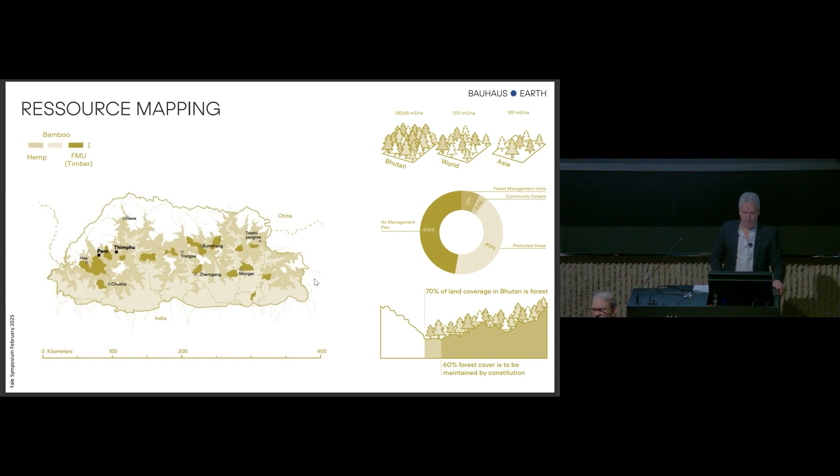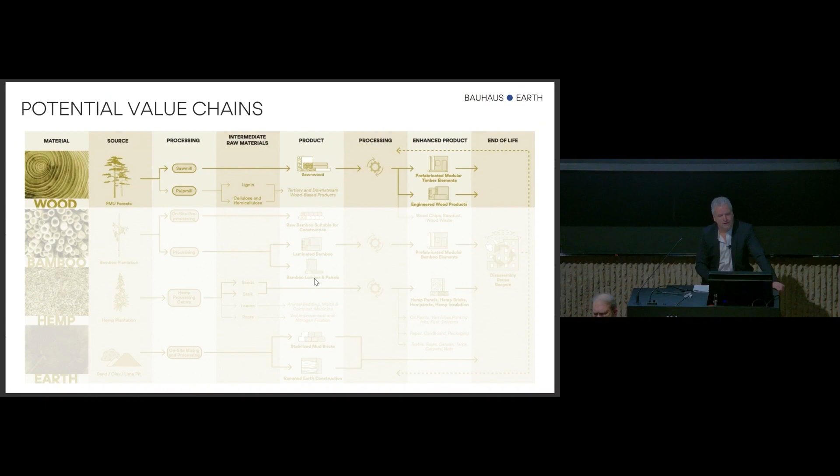This is ongoing. But coming back to wood, one of the major problems is actually the losses, the inefficiencies, and also the lack of capacities and knowledge along the value chain of timber, which is a result of basically outsourcing construction activity for decades.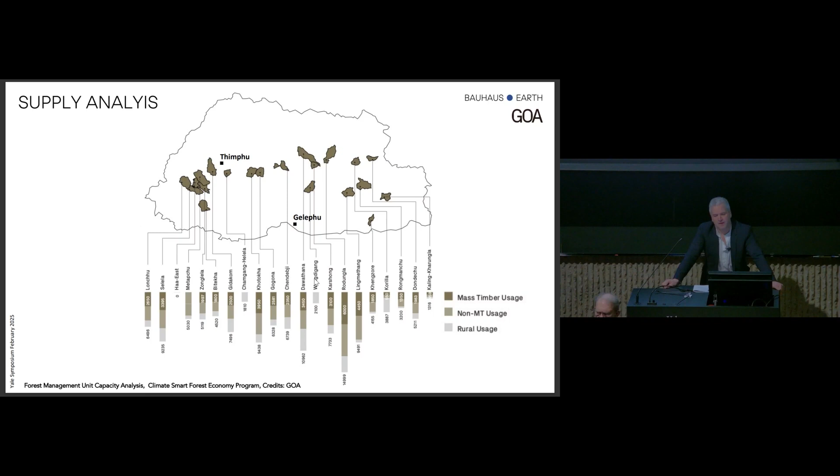Using here some work from Gray Organschi Architecture that also joined this team of researchers and consultants, and looking at what these limited forest management units where productive forestry is allowed, what they could yield and how they could feed a demand.

And then what would happen, identifying the intervention points along the entire value chain of timber, from ecological silvicultural practices and regenerative forest management that needs to be honored and also more reinforced, to promoting low impact harvesting and also forest worker health and safety, to strategically sited timber processing and lumber distribution facilities, rural employment and enterprise opportunity, to product development, material testing, quality assurance, and then optimizing manufacturing, storage, handling, grading, sorting, primary waste reduction, recovery, etc.

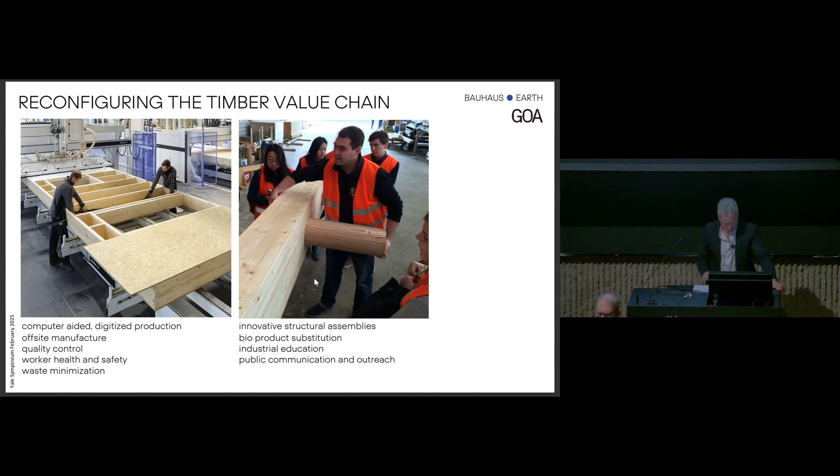And this is where Gray Organschi Architecture and Arup have developed a business model for an industrial timber value chain, actually high technology, digitized production, offsite manufacturing, to use the material that is available in best possible ways to apply it to urban uses.

And this is a pilot that hopefully will be realized soon by Gray Organschi Architecture and Arup, looking at the kind of dense urban typologies that are required to house people, to meet the demand for housing in these kind of growing valleys of Bhutan, entirely constructed from bio-based, regionally sourced timber.

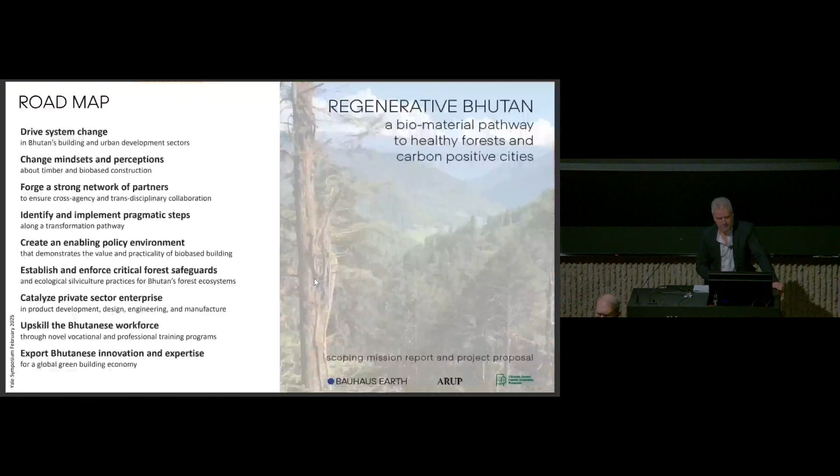We have set up a kind of Regenerative Bhutan lab, which is a site, a place for workshops, for exhibits, for interacting with local government representatives, but also NGOs, students, etc. That is key, and are developing now an update of a first roadmap that Bauhaus Earth, Arup, and the Climate Smart Forest Economy Program jointly co-authored, that answers in complex ways the systemic innovation needs to make really this transition possible.

So change mindsets and perceptions about timber and bio-based construction, forge a strong network of partners to ensure cross-agency and transdisciplinary collaboration, identify and implement pragmatic steps along the transformation pathways, create an enabling environment that demonstrates the value and practicality of bio-based materials, establish and enforce critical forest safeguards, catalyze private sector enterprise, upskill the Bhutanese workforce, and also think about how this innovation could benefit the entire region of the Himalayas.

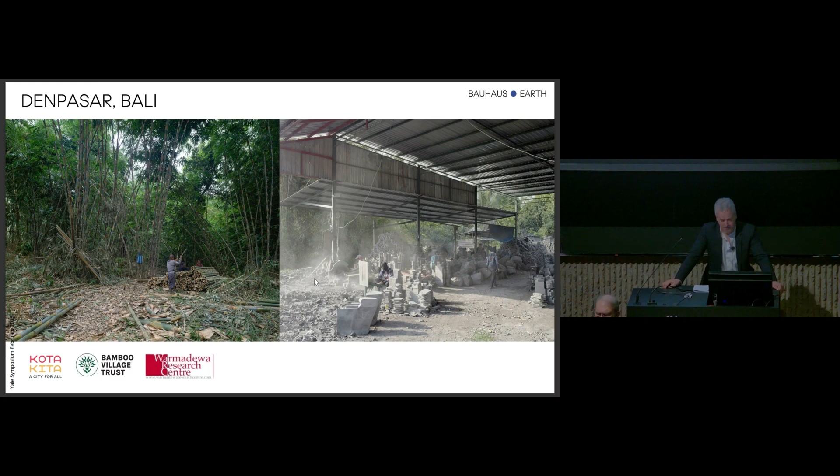I take you to the second site. Before coming back for a summary, I come back to Bhutan briefly later, to Denpasar in Bali, where the forests are mainly bamboo forests, degraded bamboo forests. There has been quite a lot of innovation for forest restoration, but the material that is yielded from that enters global packaging industry value chains and not the local building economy, which is still based on extractive materials, concrete and steel. Completely separate worlds, as it were.

And our work there also was about understanding the systems, the systemic challenges, understanding material availability, natural resources, construction sector practices, what the construction sector could actually carry and deliver, and where are opportunities and also challenges for material transitions there, but also looking at social spatial dynamics, policy regulation barriers, and also key actors that could really lead a system change.

Again, we found it absolutely necessary to work also very concretely with specific material sets, understand along the entire value chain, and also build and pilot buildings that could be smelled and touched and looked at, and ultimately do much more convincing work than reports can do. And I'll talk about that in a second. And this will lead to a broader policy document, which we call a roadmap.

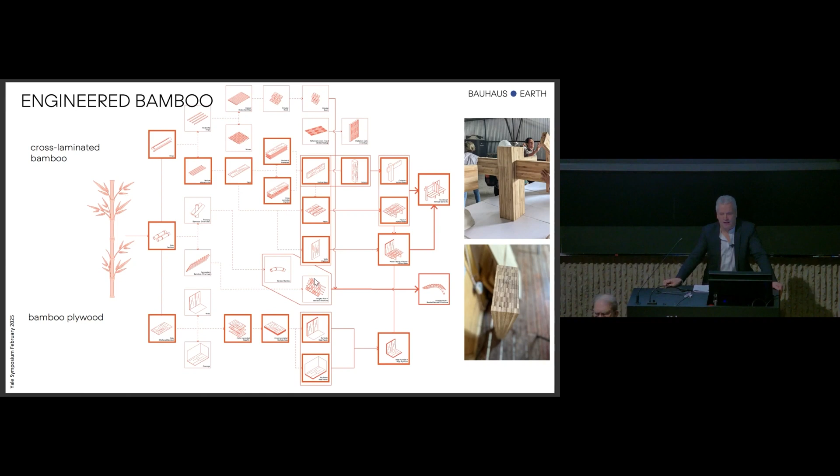So understanding the opportunities of bamboo means understanding also the existing value chains, and also find ways of discussing a gentle kind of industrialization to create more efficiency, optimize the material intake, and also end up with technical solutions around, for instance, cross-laminated bamboo and bamboo plywood that would actually be more suitable for industrial and also urban housing solutions.

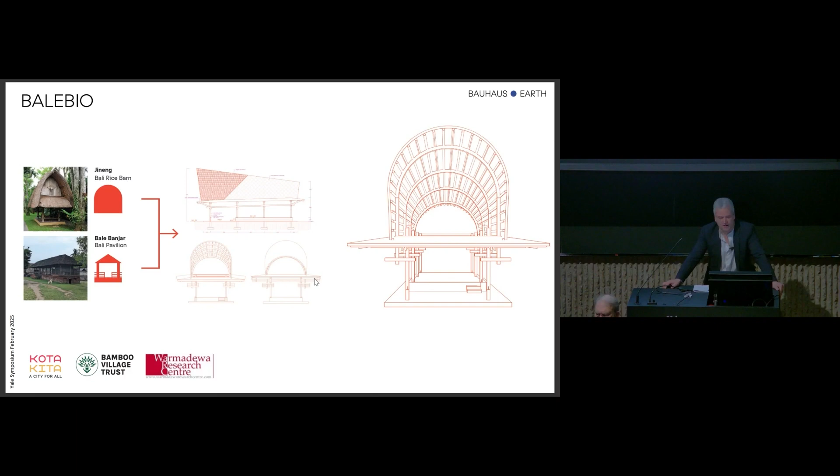But then, of course, we need to play it back into the system, think about scaling. And we are right now working on adopting an Indonesian national standard for engineered bamboo products, and also having conversation with the national government that has a bamboo action plan and is willing to build a third, i.e. 1 million homes across Indonesia from bamboo for a social housing program. And we see what amazing reductions we can achieve when we use these locally resourced materials.

Final site, before I come to an end, is Berlin-Brandenburg, where we are based. It's a complex story, but again, it is a kind of dysfunctional system that requires careful analysis and repair. So we have, for instance, as a post-war legacy, the largest concentration of pine plantations around Berlin that replaced beech and oak forests that were destroyed in the war or became reparation wood and shipped off to Russia. So this is what East Germany could afford.

And now these are ecosystems that are under heavy climate pressures. They are burning, there is beetle infection, they need replacement. We have a stock that could potentially house 20 million people, but because of regulatory barriers and, quite frankly, a dirty timber industry, 80% of that stuff gets exported to Austria or China or even Canada.

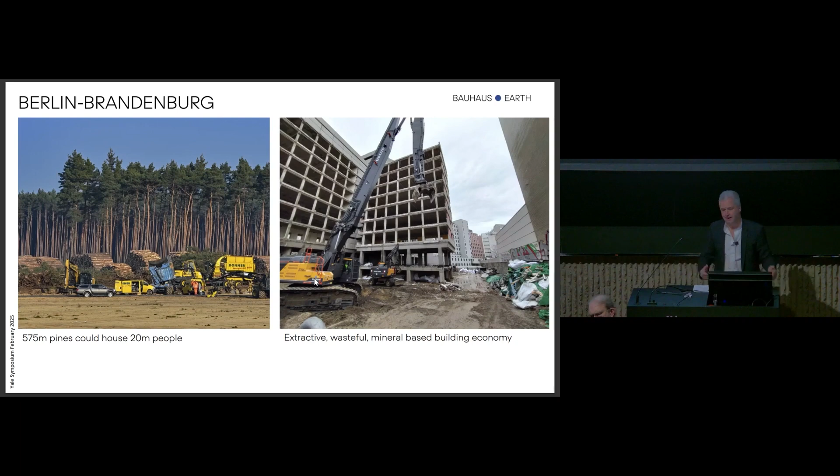At the same time, we have a building economy that is extremely wasteful. We're losing buildings on a daily basis because demolitions are not regulated, mainly from the 50s and 60s. A lot of carbon is wasted and then replaced by conventional building practices. We are also experiencing maybe a milder form of populist backlashes against any climate transition or green construction arguments.

We have also a kind of urban-rural divide around Berlin, a disenfranchised rural population that tends to vote for the far right. We have an election coming up next week. We have climate transitions and sustainable architecture like a hot potato, not wanting to be touched by any of the parties. So what do we do?

Again, small steps, showing what is possible on the ground. We did systems analysis with partners there. We looked deeply into available forests. We looked into what the restoration, the climate proofing of the forest system around Brandenburg would require, what kind of investment, what kind of species.

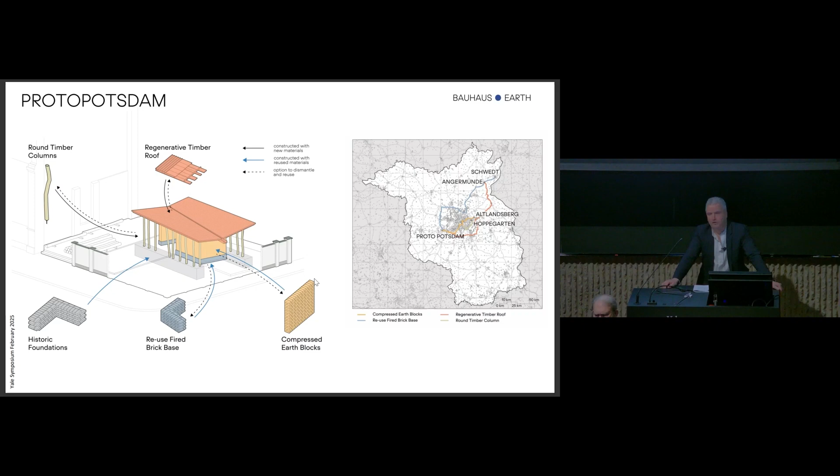But we also want to show how it can be done and combine these material streams that are locally sourced from trees, rare species, also from construction waste or recycling, put them together into small touchable, smellable sites and places which are then used for education campaigns, for workshops, etc., and demonstrate as live exhibits how a radical regional regenerative architecture might look and feel like.

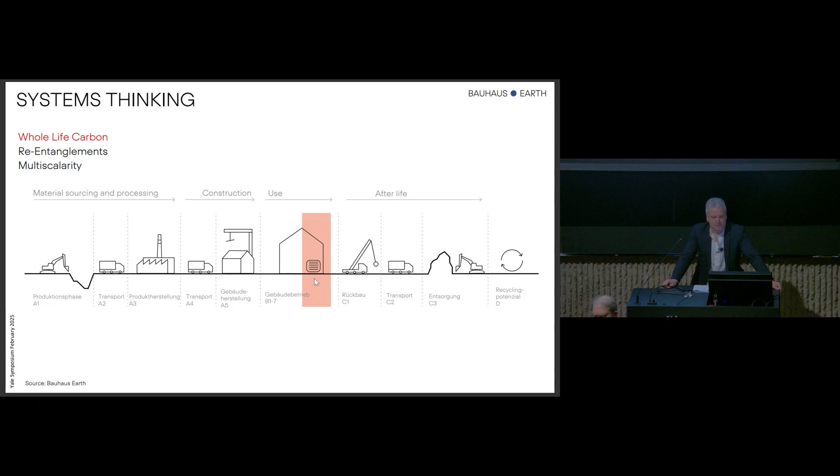So coming back to some concluding thinking, what is this systems thinking that we all advocate? What does it mean when you have boots on the ground? Of course, we still need to understand where the carbon is, what Alan explained, what everybody talked about, where the carbon in the building cycle is. I have a life cycle perspective, understanding where material comes from, how we end waste and reduce and optimize our building product value chain.

But we also spot the key opportunity here in thinking more broadly, away from a city-centric approach towards a more regional approach, where we really need to understand, and this is also a planning question, a land use question, a governance question, the entanglements that we want to draw on between natural resource landscapes that might provide bio-based materials and cities.

And creating a synergetic co-repair, as we sometimes call it, through regionally sourced nature-based construction materials, ensuring the value increase upstream in the biosphere, because this is where it could generate money that is necessary and is lacking to actually restore the forest or re-wet peatlands, and downstream through regenerative construction in cities.

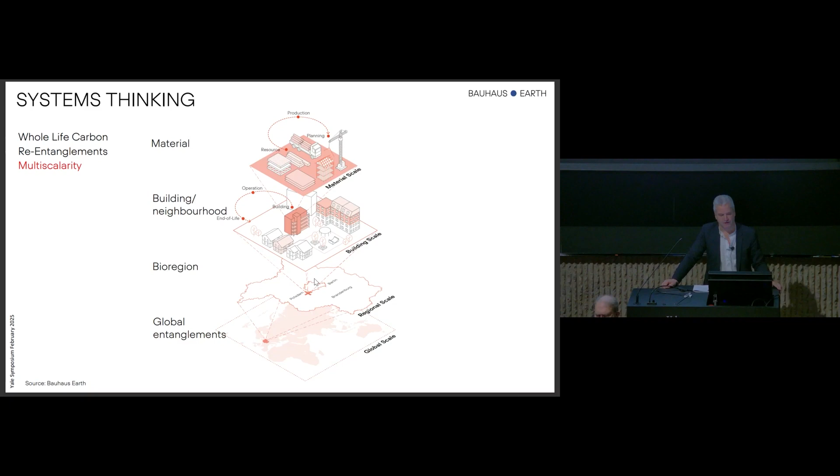And we also need to think across different scales. It's not enough to think simply about materials or product value chains. We need to think about cities and neighborhoods. We need to think about bioregions and continued global entanglements. And to add another layer of complexity, we need to acknowledge that we have multiple entry points into these system change pathways, responding to local political priorities and feelings.

So, for instance, in Bhutan, we have a very strong motivation of the government to provide jobs for a youth population between the age of 17 and 25, 70% of which has left the country to seek jobs in Australia. So we need to have well-paid jobs in the construction industry. It's one of the main motivations. Bhutan is also very proud of its ecosystem stewardship, which should not be challenged.

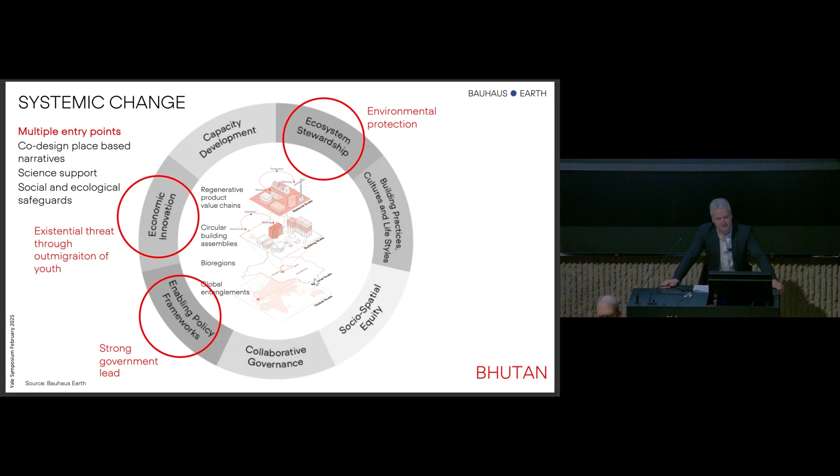And it's a very strong government-led process, completely different from, for instance, Bali, where the government came into the picture only much later. There's much more motivation around local building cultures and lifestyles.

In Western Cape, we could not get a seat at the table or a door open to us when we talked about climate transitions. We had to talk about entrenched social-spatial inequalities and youth unemployment and poverty, and what sort of opportunities we could harvest through this transition for a more distributive economy, for low-skilled jobs, for income generation.

We have to acknowledge there the dark material histories: my grandmother lived her entire life in a township, and now you want her not to have that concrete and brick house. And also there are huge economic incentives.

And in Berlin, the situation is yet again different. We face over-regulation, we face a lot of myths against timber or bio-based materials, an increasing cost of living crisis, a housing crisis that immediately considers any kind of material discussion a luxury, nice to have but not essential.

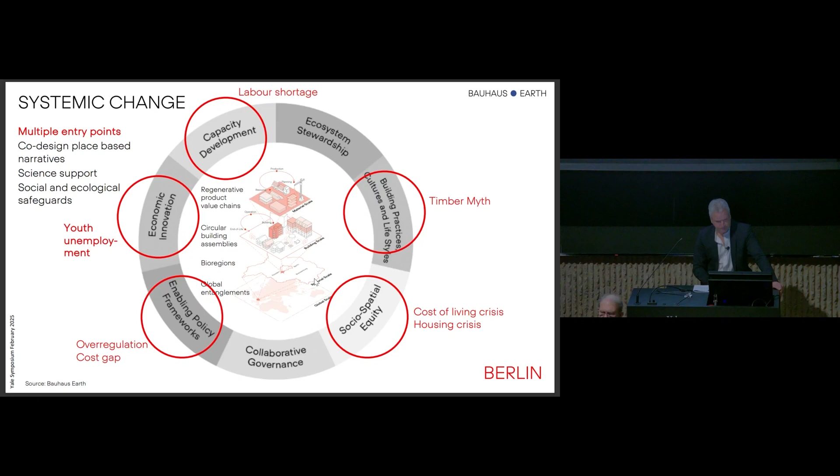So with these thoughts, I'll leave you, and I really hope that everybody else in the room that will talk after this panel will enrich the discussion about solutions. Thank you very much.